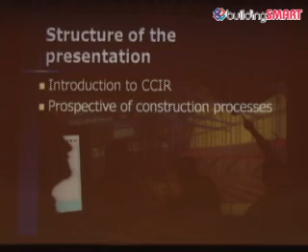I would like to share with you some of the issues with the construction industry that we've been experiencing in Europe and in the UK in particular, and some of the functionalities of VR and BIM that we are experiencing in Europe and the UK. And I will share with you some of our R&D, which is going to be an enabler to process change and enable the adoption of the technologies. And perhaps I'll share with you some of our future R&D in this particular respect.

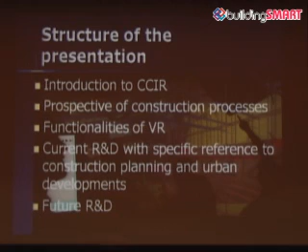Just quickly, we are based pretty much in the northeast of the UK, as you can see here. This is London somewhere, so we're based here.

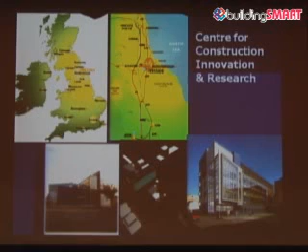We're renowned for virtual reality technologies, and particularly for 4D and 5D technologies that we've been developing and researching for the last 10 years or so.

Basically, we work with a wide range of international and multi-international companies, varying from clients to contractors to developers. So it's quite exciting to have a view of the industry rather than only a particular sector of the industry.

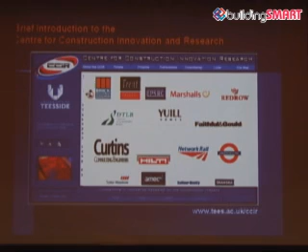We're particularly focusing on 4D, 5D technologies and the virtual reality embedded in this, and how we can improve the process.

Now, before I start to talk about some of the technologies and some of the development, our view in the UK, particularly in the UK and particularly in Europe, for the last 10 years, there are certain issues with the construction industry. It's pretty fragmented.

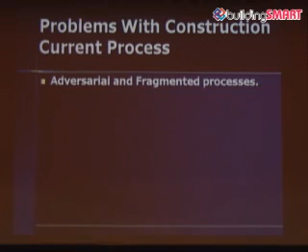There is very little money and time spent on the design, and particularly our plan design process. And therefore, when we come to construction, we start to pick up the problems and pick up the issues.

I just sort of echo what my previous speakers have been talking about in terms of the fragmentation and the role of IT in terms of bringing the process together.

But basically, there are lots of problems in terms of little time spent on design, minimum communications and interaction between the construction team with the client, advisors, contractors, subcontractors. There is an issue here.

The other problem is high out-turn cost, and this is why, particularly in the UK, this has prevented investment in this particular sector for some time, because there isn't any certainty that the cost is going to be fixed, and therefore cost escalation is causing a massive amount of problems in the industry.

Poor site planning is another sort of issue, full of problems, full of issues to do with health and safety.

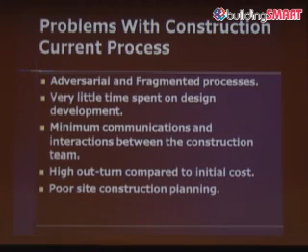Now, that is the problems, and whoever you talk to, people will say, well, it is a one-of-a-kind product, it is a temporary organization, I haven't gotten used to this particular team, there is pressure on short time, pressure on delivery, the weather is a problem.

So we managed to find a wide range of problems, a wide range of excuses for our problems, for why construction is being delayed, why it's over cost, why the quality is not as it should be, and why there is a massive amount of fragmentation in the process.

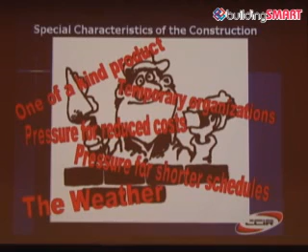So this is our starting point. Then we have targets that have been set in the UK for the last 10 years.

Basically, the targets are to increase profit, turnover, increase productivity, increase predictability, reduce capital, reduce construction time, reduce defects, reduce accidents by 10, 20 points respectively. These are major targets for a rather fragmented industry.

So what we needed, about 7-8 years ago, was a massive boost in terms of research and development, a massive boost in terms of money spent looking at the problems and how we're going to tackle or achieve these targets. Somebody might say we need a revolution in the industry to hit these particular targets. That's where we started, looking at how we're going to do that and what is the best way of doing it.

So the vision we're starting with has been shared all across Europe through lots of funding spent on Framework 7 projects, with Europe putting a massive amount of research and development money into this area. The idea is to have the project life cycle start from the ideas, then the design, with BIM at the very heart of it, and then the client with different actors - the client, the end users, designers, contractors, facility management - frequently looking at the interaction.

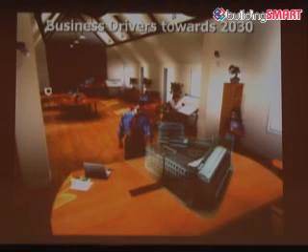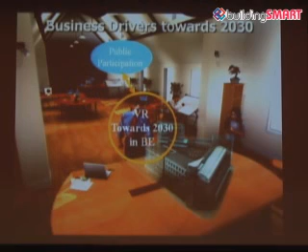Now, we've been doing some work in terms of the UK, looking at what the business drivers will be in 2030 in the built environment. Given these are problems, what are the business drivers? So we came up with some business drivers. There is a massive increase in public participation - the public have more power.

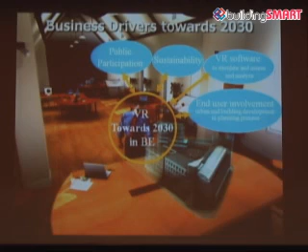There is massive growth in terms of sustainability, VR and IT to simulate processes. We think there is lots of end user involvement in urban, building and planning processes, increased partnering arrangements. This is happening as we speak with PFI, which is Private Finance Initiative, which the UK is leading, and DOT and other things. So therefore there is also increased partnership and collaboration.

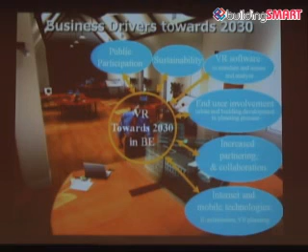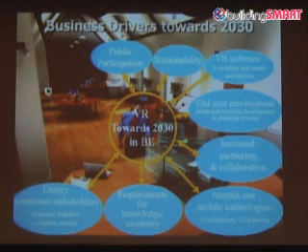That's a business driver towards a better construction industry. The internet is opening up, particularly Internet 2. Procurement for the knowledge economy is quite vital, which is a requirement as well. Energy - any project now, whatever the shape or form, in Europe or in the UK, should have at least 20% sustainable renewable energy. At least 20%, and that's the law. So basically these are the drivers that we've been pushed by, and how we're going to do it.

So therefore things are changing - there is quite a lot of change there. There is lots of government regulation and legislation linking energy with sustainability, with partnership, and with research arrangements. And obviously there is competition to provide efficient quality products and services. So these are the business drivers that we think are going to influence our built environment. So therefore, how are we going to gear ourselves in order to deliver on these big issues, on these big drivers?